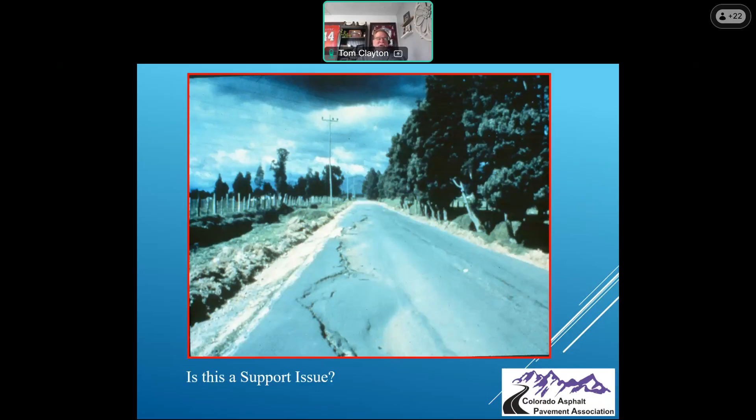Well, the short answer to that is it's something else. That was a subgrade failure, but it was caused by some other influences, such as moisture rolling across, running into that ditch, and causing those.

So we want to make sure that we're putting the right mix down on the right roads, and then we're compacting it.

So those are just a few little tidbit slides that I put up front, so we had a little bit to chat about as we get going.

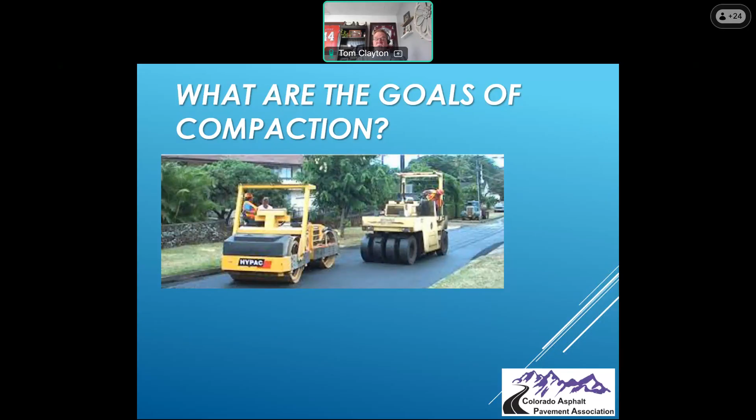The real question here is, what are the goals for compaction? The goals for compaction are to maintain the grade, slope, and profile that the paver left. The paver is a very sophisticated piece of equipment in today's world. We want to make sure that what we're doing on the back end doesn't affect what we did on the front end.

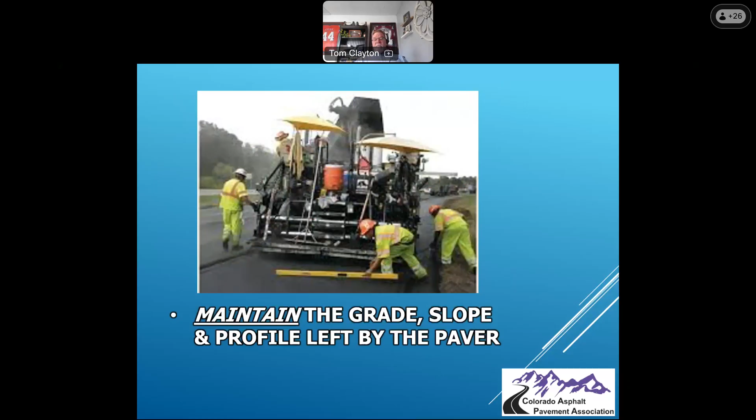We talked a little bit last week about placement and all the things that go on with placement. So in this presentation, we're going to talk about how to maintain that. There are a few things that we want to talk about, and that's passes and coverage.

There's a lot of discussion about what is considered a pass. Passes, in my mind, are every time that the roller completes a loop—that's a pass. So if it goes down and back, that's one pass. Down and back is two.

You can see in the illustration here that they're saying a pass is when it passes you once, then passes you again, and passes you again—those are passes. Those can be debated and talked about for long periods of time. But for my illustrations, let's say that a cycle is considered a pass.

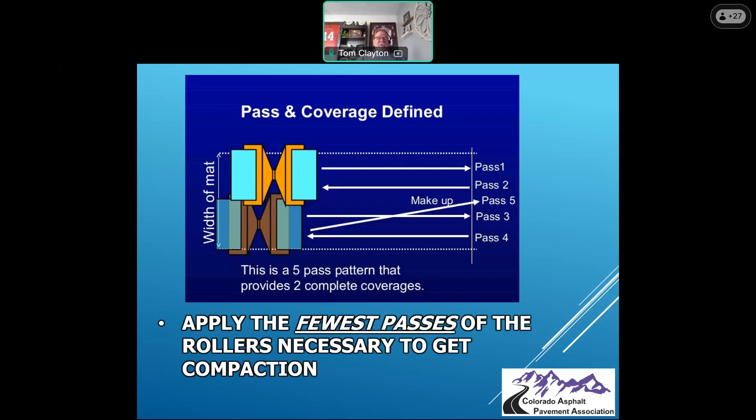The goal is to get the material compacted with the least amount of passes to get the density required. We want to apply the lowest amount of compactive effort to get the highest amount of density.

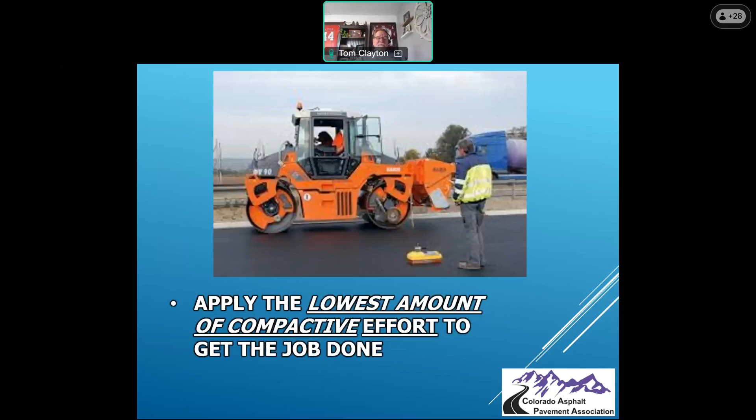We have to understand how the material compacts. It compacts on a curve. It will get to a certain point where it reaches its maximum density. And if compaction energy is still being applied, it will start losing density because it'll start breaking apart the particles,

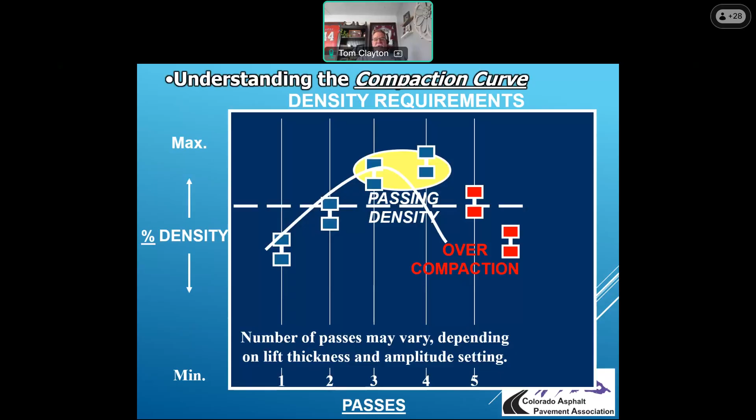and you'll lose density in the mass. So we want to make sure that we're not over rolling it, we're not under rolling. We want to be right in that sweet spot to where the material will get us right into that yellow zone on my illustration there. We want to stay in that illustrated area.

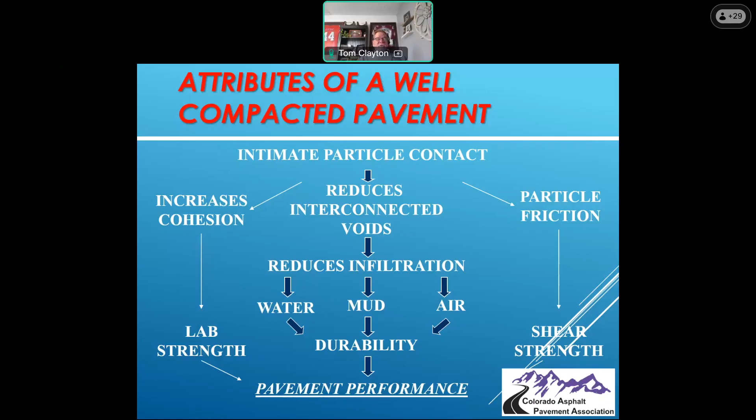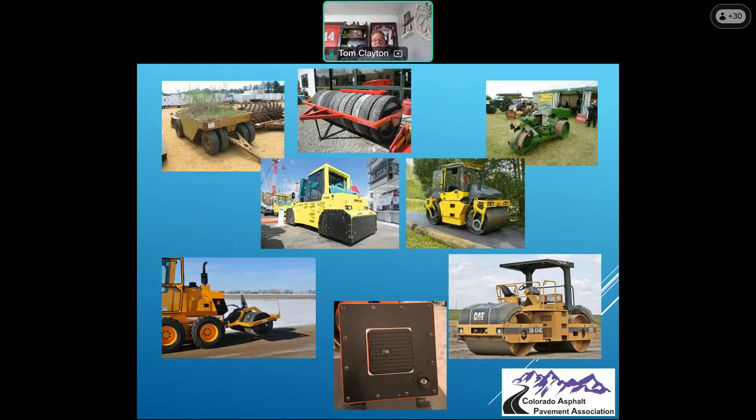The two you see are the Cat roller and that Bomag roller, the bright yellow one and the dull yellow one. Those ones have what's called IC, or intelligent compaction, on them, where it's monitoring the resistance in the mat. But this new HOM one is the first one that's come out that's actually measuring density, and it has to be correlated with a nuclear gauge or cores. They run over it three times, and then it will correlate, and it reads actual density. So that's a very new concept, a very new piece of equipment.

So other things that we're seeing more and more now that we didn't see even 20 years ago was night paving operations. Night paving used to be kind of a one-off, two-off kind of thing. Now night paving is becoming more and more mainstream. With that, we're seeing more SMA go down, we're seeing SMA at night, which creates a little bit of a problem.

SMA, in order to get it compacted properly, you have to have plenty of heat. At night, we lose heat. It's hard to see asphalt going down at night because it's black, and it's dark at night. It's hard to see flaws. It's hard to see missteps.

It's hard to see things that are going on, so those are things that we got to look at. Other things you can't see during night paving are segregation, and you can't necessarily pick up the bumps and dips, the smoothness issues. But smoothness is a high priority on all roads, whether it be a state highway, an interstate highway, a city road, a collector, an arterial, or a residential street. Keeping roads with low segregation and good smoothness is critical for the long-term life of the road, and that's all part of what we need to do in our compaction process, to not create problems through the compaction process. So how do we do that?

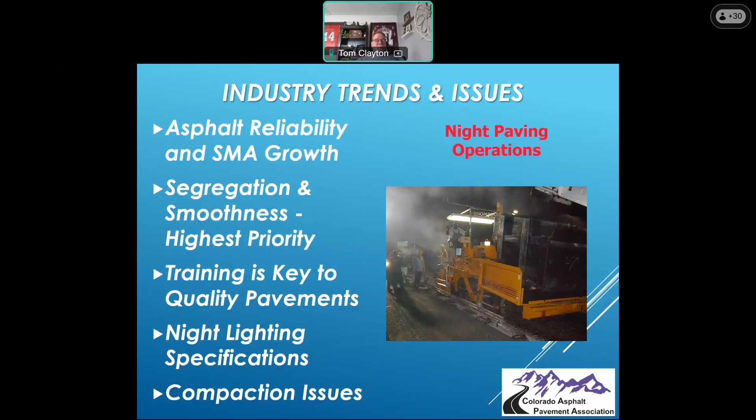Staying on the night paving topic: night paving used to be done by candle and flashlight. In today's night paving world, the light plants and lighting specifications are crazy, how much light they have out on these plants to make everything very visible. And then that last point is the compaction issues. The compaction issues at night happen because the mat cools down quicker, especially when using a polymer modified mix. There are things we have to adjust to at night that we wouldn't do during the day.

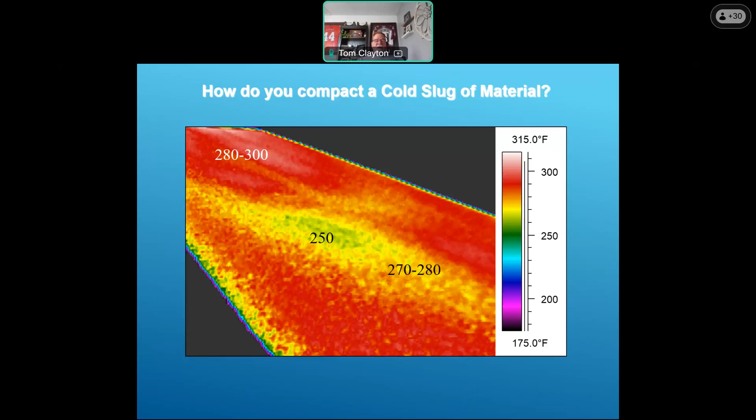How does a contractor know what to do to attack that cold slug in the mat? Well, the short answer is they probably don't even realize it's there. They're going to run right through it. That's probably either at the beginning of a truckload or at the end of a truckload, and they don't even realize it's there, not unless they have some sophisticated equipment, which I'll talk about in a minute.

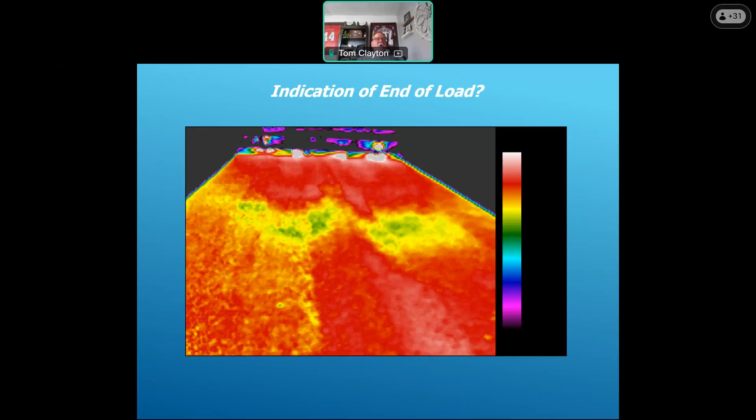If we get a cold end of one load and a cold beginning of the next, we're going to magnify this, or double up the size of that issue. How does the contractor or personnel on site, the city inspectors, county inspectors, state inspectors, the testers, how do they know that's there? Well, you have to have equipment in order to figure this out.

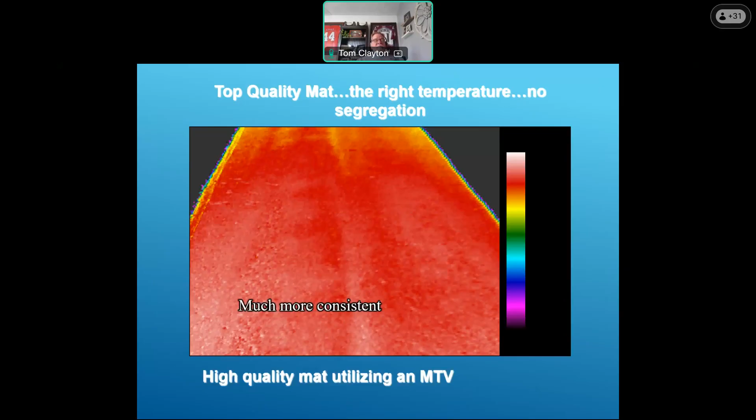So a good quality mat, you can see that consistent temperature all the way across the mat. It's going to help in the compaction process, and help make sure that when they set up their roller patterns, they'll be able to roll it in a good, even pattern all the way across, up and down the mat. So the whole goal here is to roll for quality.

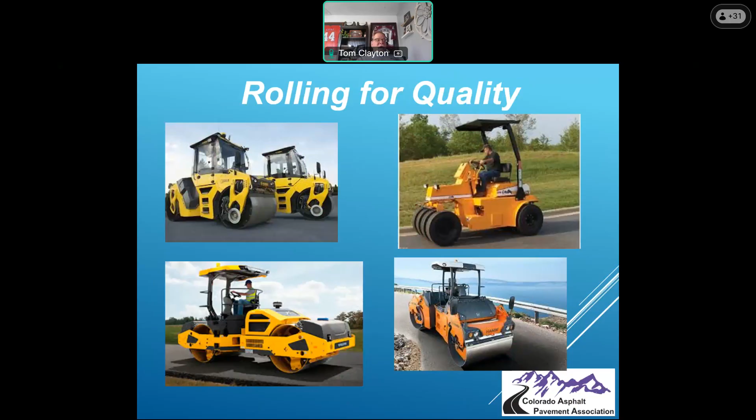We want to make sure that we have the proper equipment. You can see I've got pictures of all kinds of different equipment here. In the upper right, the little Lee Boy 7-wheel roller, you don't see many of those except in small parking lots or small pavements like bike paths, those kinds of things. Then you have the big boy rollers, shown in the other three pictures, that we'll use out on city streets, highways, byways, airports, those kinds of things.

Construction of quality pavements, if those of you who were on last week should have seen this same slide. It is a balancing act between the production, the trucking, the paving, and the compaction. The problem with all of this is the first three can change: the asphalt production, the trucking, and the paving. Those can change at a drop of a hat.

We can increase our production. We can increase the number of trucks. We can increase how many tons are going down. But if we don't adjust the compaction process, we could lose everything, and we could lose it very quickly if that is not adjusted. So it's important to make sure that everything stays in balance. If any of the first three change, the last one's got to change with it.

So the goals for compaction, what are we trying to accomplish, is we want to be able to put the material down so that it will outlast the design life. Design life on pavements today, depending on what you're doing, a new pavement, you would expect it to last anywhere up to 30 years of total life. That's for the entire pavement section. The sub base, the base course, and the pavement section should last 30 years or greater without having to rebuild. Now, with that said, there are other things that we have to take into consideration.

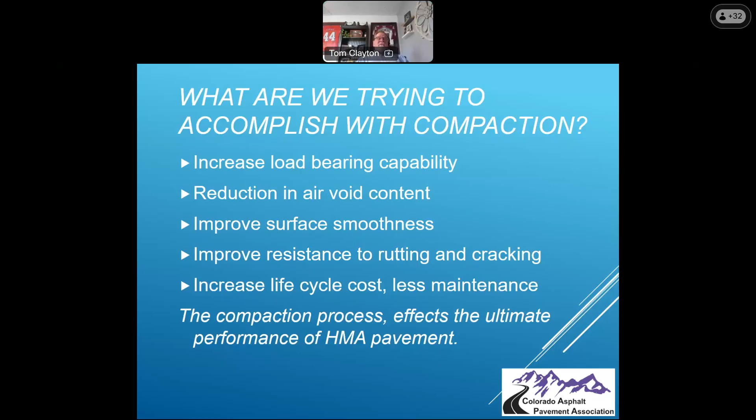So the fifth bullet point there is increasing the life cycle costs, which is less maintenance. We close up the voids. We get higher density. We're not going to see the wear on it. We're not going to see the water and oxidation damage. So we're going to increase the life cycle by not having to do as much maintenance on it for potholes, crack sealing, those kind of things, because we're going to take care of that on the front end. So the compaction process can affect all of those things. Those are things that we have to be looking at.

Variables for compaction.

Question popped in: how many municipalities are replacing all pavements on a 30-year life cycle? That would be absolutely none.

With funding constraints, It feels like we need 40+ year pavement cycles. Early failures are extreme. Eric, it's hard to predict.

I talk from where I'm sitting in my office right now. I'm looking out on the road right in front of my house that was repaved this year. The road was built in 1973, and this was the first overlay on it. They did one intermediate treatment in 2008, a slurry seal, but this is the first overlay that's been done.

So it was 47 years that this road had lasted. So I think what you're saying is our engineers need to figure out how to design to 40 minimum. They just haven't got there yet because they're engineers, and you being an engineer, they're always looking at that factor of safety. If I say it's a 40-year design and it only lasts 35, they're going to come down on me.

So I agree, it's impossible to predict an early failure, and it's costly because once it happens, you have no budget for it. Well, where you guys are at, you have an unlimited budget - I say very facetiously, just like any city or county or state. There's not enough money to maintain the roads as you have them right now. So it's virtually impossible. So yeah, I agree.

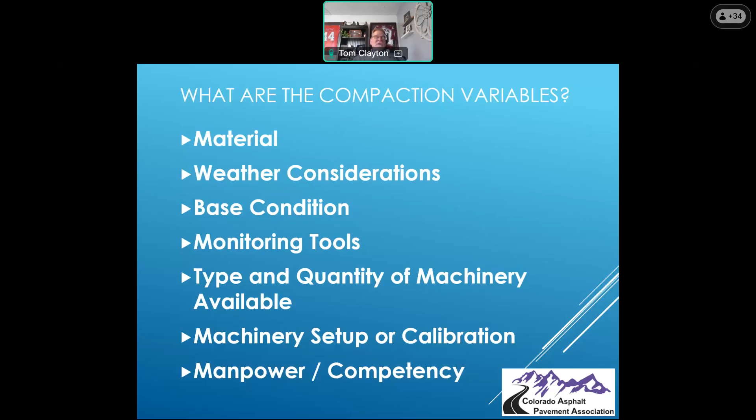So we want to make sure that we have all of that stuff done. The last one is, it doesn't matter how good your equipment is or how good the 6 steps above are. If your manpower is not sufficient, if you're having people jump off of one piece of equipment to get on another, or you have people on pieces of equipment that don't understand the equipment and competency is low, you're in a losing situation. We want to make sure that we don't get into that losing situation.

I talked about Super Pave. I talked about Marshall. I talked about where we're going with balanced mix design. Balanced mix design is just another evolution of Super Pave, going to do it with a little bit different twist.

So Super Pave is an acronym for Superior Performing Asphalt Pavements. It's a superior approach for going after what we were doing pre-Marshall. I'll talk a little bit more about that. Super Pave really took us out of - going back to the question that was asked a little earlier about 20 and 30-year designs.

When the interstate highway system was started in 1956, it was designed to last 30 years. Super Pave started in the early to mid 1980s, because our interstate highway system had reached its 30-year design life, and they were looking at it going, what do we need to do? That's why they said we got to do things differently, and came up with Super Pave.

Prior to Super Pave, Marshall was, we can use whatever materials you got, wherever you got them, we'll make a road and make it last. One type of binder, and it all works. Well, yeah, it was great, and it's still around - we're still using Marshall 100 years later - but it wasn't the cat's meow.

Super Pave was never designed or intended to end. It was intended to be a continually evolving process, but it kind of got stagnant. We said, oh, everything's doing great, let's just leave it alone. Here we are now, nearly 30 to 40 years later, and we were still stuck in the same spot. That's why everybody's starting to look at balanced mix design now, which is the next step or evolution of Super Pave.

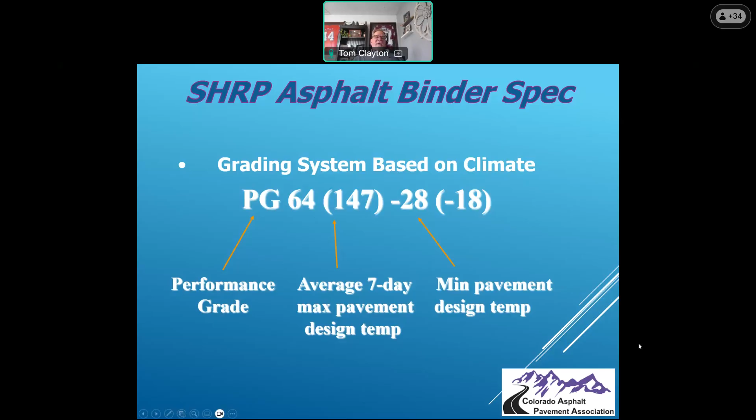There are weather stations all across the country. You can go on the NOAA website or ltppbind.com and pop in a zip code, and it will show you every weather station within that zip code. It will tell you what is a 50% reliable binder and what is a 90% reliable binder. But that doesn't mean those are the right binders either. Just because it's 50% or 90% reliable doesn't mean it's necessarily the right binder.

We see people over-specifying binders all the time. It'll say, well, this is the 90% reliable, so we're going to use that one, say PG 64 minus 22. Well, it's a lightly traveled residential situation. You might want a softer binder, like a PG 58, in a residential, lightly traveled situation.

So moving on to compacting. The difficulties we see are more crushed aggregates, less fines that don't create that lubrication. The fines hold the oil, which creates the lubrication to let the particles move during the compaction process. So the more crushed particles there are and less fines, it's going to become a problem.

Cheating the binder out of the mix, with lower asphalt cement content or lower binder content. The binder, again, is a lubricant. And if we cheat the binder out of the mix, we're not going to be able to lubricate the particles and let them move by each other.

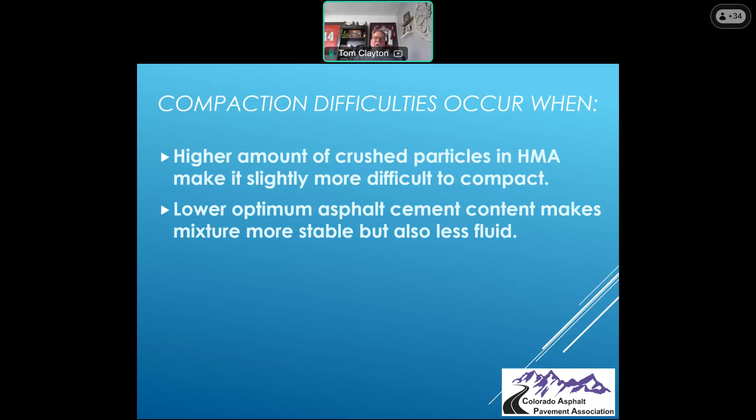That is why moving to balanced mix design is becoming more and more of a top shelf issue, because we want to make sure we have that binder in there to keep the particles moving to resist the cracking, but not let it rut. So we're going to work through that, and we're going to get there.

Temperature is ignored, and there are two or three temperatures we can talk about. The ambient temperature, which is really irrelevant, the mixed temperature, which is really a driver, and the ground temperature, which is a driver. The two drivers, ground and mixed temperature, are critical to look at when paving. Ambient temperature is irrelevant.

If it's a cold weather day, ambient-wise, and the ground temperature is sufficient, and the contractor has temperature in the mix, there's no reason they shouldn't be able to place the material properly and get it compacted. It's going to require a change in thought, a change in process.

If it's a cold day and I'm the owner or the contractor, I'm going to have my testing people on site the minute material starts coming out of the back of the trucks into the paver. And I'm going to make sure that when the rollers are on it, I'm getting density in that first truck, the second truck. I'm going to make sure we do what we need to do.

Do we have to tighten up the rollers? Do we keep the rollers closer to the paver? Are we staying within the compaction temperature zones? Those things are going to be looked at. So if we drop out of those compaction temperature zones, that's when temperature is being ignored, and we can't do that.

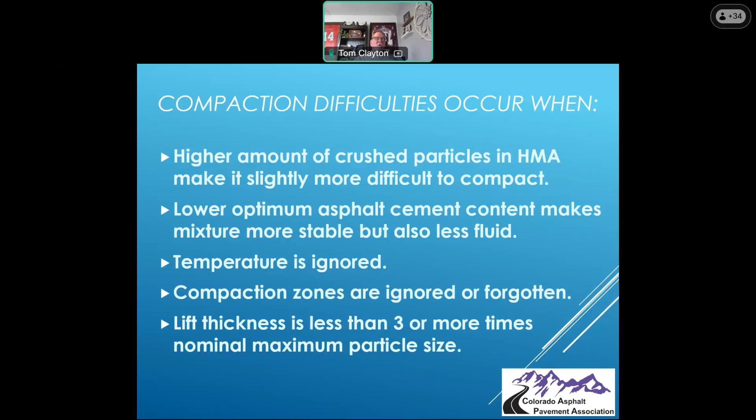It's like on a car, all of a sudden you see rust all over your car and you go, where did that come from? I never saw it. Because it rusts from the inside out. This is the same thing, the particles are crushed internally. They don't hold up through traffic and weathering. They fall apart. You start seeing delamination.

The last bullet point here is, if the contractor's equipment setup is ignored, they've got to make sure they set their equipment up properly, that they've got the water spray system on the steel drum rollers, and that they've got a good drip system on the tires, on the rubber tire rollers.

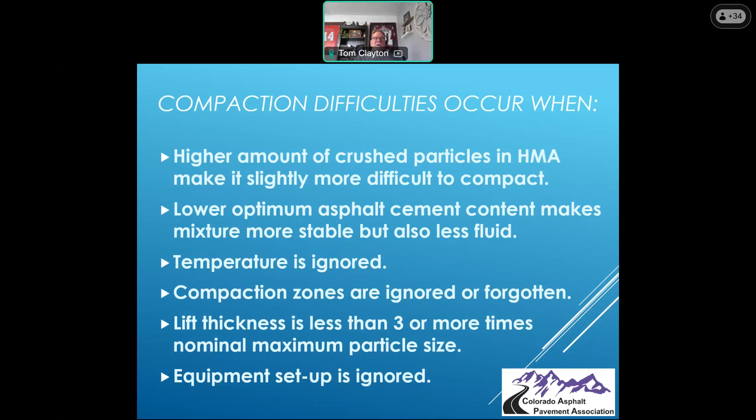They got scrapers and mats on both of those, that the paver is set up properly. Everything has to be set up properly.

We know there are still a lot of holes in the science, but it's important that every person on the team be out there to help plug the holes. And it's not, well, you need to do this, you need to do that. No, it's need to have a discussion. Why is that happening? What went wrong here? What can we do differently here? What are those things? We have to understand the appropriate things to do.

So these 6 bullet points here. What is the appropriate compaction temperature? I say this all the time. I lead the inspector certification, asphalt APM, asphalt paving materials inspector certification sessions, and I talk about this all the time. The appropriate compaction temperatures for any project should be determined right at the beginning of the project, whether it's a residential overlay or an interstate highway. On interstate highways, state and federal jobs, you have to do what's known as a CTS, or a compaction test section. Residential paving, you rarely see anybody do an official compaction test section. However, the first day they are paving on the project is the compaction test section.

That will set up the appropriate compaction temperatures. When does the breakdown roller get on? When it's this temperature, and he's done by this temperature. The intermediate roller gets on when it's this temperature, and he's usually done by this temperature. And the finish roller, same thing. How many passes? Are they in vibratory or static mode? What are all those things?

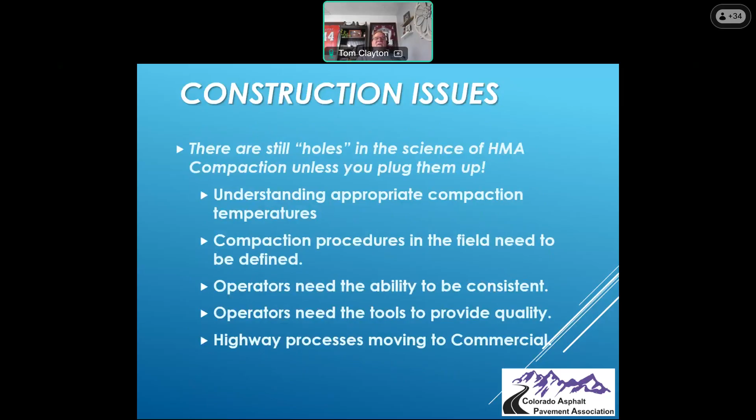The operators need to have the ability to provide quality. They need the tools. Do they have the right monitoring tools? Do they have an infrared heat sensor, or just a laser temperature gun? What tools do they have to make sure that things are being done? And then understand the difference between a highway process, a city street process, a collector process, and a commercial parking lot. They're all different. This is just a bunch of temperatures that I threw in here.

This is years and years of gathering data. So the material leaves the plant between 350 and 270 degrees, depending on the type of material. Some of you are saying, man, I hope mine's not coming out at 350. Well, if they're doing SMA, it might be. If you're doing a dense graded mix, 290 is probably about where you want it to be. You don't want it to be anything over 290.

That's where we're at. The next range, 340 to 315, is where placement occurs. That's on SMAs. Again, if you're coming out of the plant at 290, it's going to be pretty tough to put it down at 315. So it's going to be lower.

Compaction range from 340 to 110. And I'm seeing some of you, figuratively, your heads are shaking and your eyes are wide open. I say 110, yeah, 110. You can compact down to 110 degrees. However, with that said, everything has to be done correctly, meaning they have to have put in a warm mix additive, or WMA. If they don't have a WMA, they should probably be off the mat by no less than 160 degrees.

You can keep compacting, but it's important that somebody be out there monitoring that. If it starts to crack, you get fine little cracks across the mat. It's too cold, it's breaking apart during the compaction process, meaning the binder has lost its cohesion and broke apart, creating all those little fine cracks that allow for oxidation and moisture damage to occur. So it's important that the inspector on the project be out there watching for that if they're paving or compacting at lower temperatures.

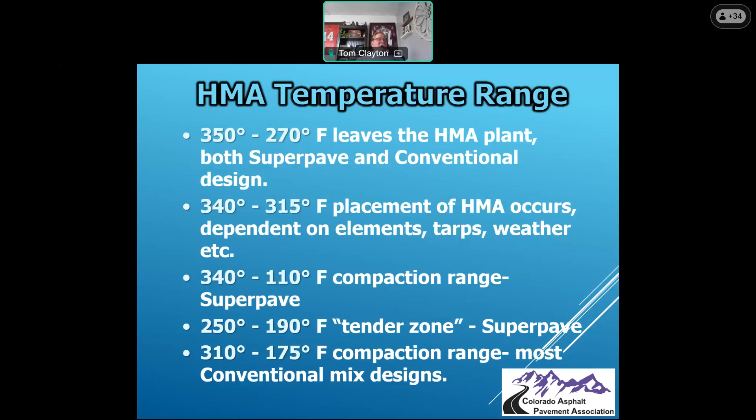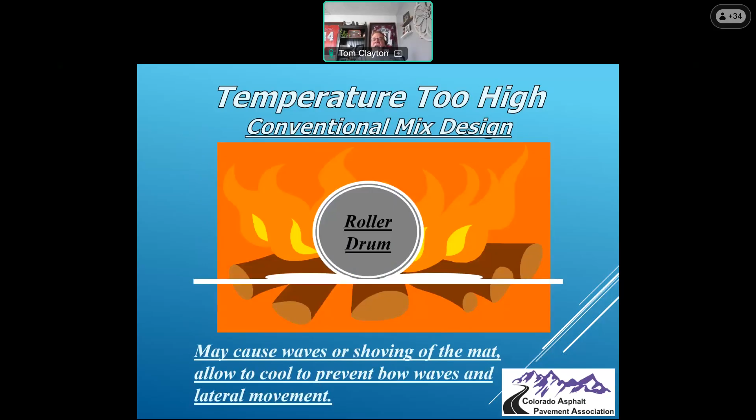Can go down to 160. Again, with WMAs you can get even colder. If the mix is too hot, it's going to roll, bubble, push - there's lots of words we can use here - cause waves. We want to make sure we're not getting on it too hot, not letting it get too cold. So it's important that the mix coming out of the plant is the proper temperature and that it's being put down at the right temperatures.

Compaction at 240 and above is recommended for breakdown and intermediate. Finish rolling, obviously, they want to let it get down to a point where the binder is going from its liquid to its solid state, and you're just above that point. You want to finish it just before it goes from liquid to solid.

So if the temperatures are too low on a conventional mix design - well, I really blew that misspelling, conventional mix design - we want to make sure the mix will work on those things. So conventional mix design, if you get below that 175, it's going to be tough to get the material to compact.

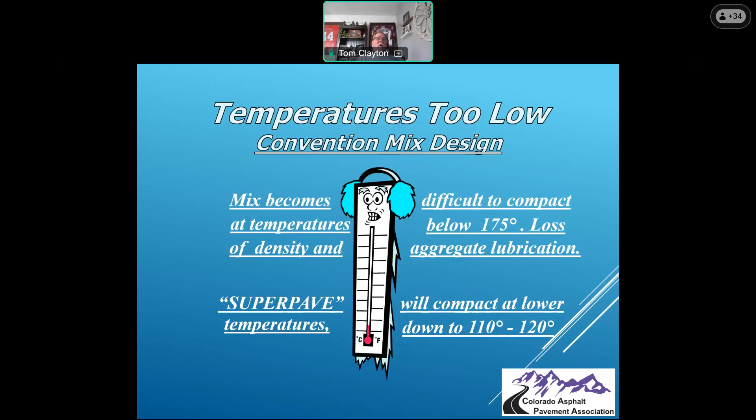That 110, 120 with the WMAs in the mixes. But it's important that once they drop down below that 170, 160 range, the inspector or other personnel are out there watching to make sure they're not causing damage to the mat during the additional compaction process.

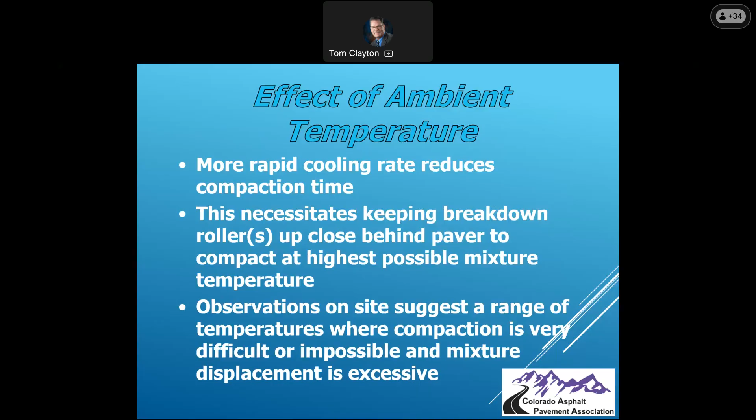The effects of ambient temperature - again, I talked about it being irrelevant a little bit earlier, but it has to be monitored. Process to get it to compact in a sufficient manner and get it to give us our life. So the necessity is that we got to make sure we are monitoring the situation, the contractor's monitoring the situation, all the team is out there looking at it, making sure we get everything done in a smooth and efficient manner.

Oh, I've got a couple things coming in here. Hang on, looks like it disconnected and reconnected. Now the slides aren't showing. We can no longer see the slides. Trying again. Are we back on? You guys let me know. I've got one that says effective ambient temperature up. Somebody let me know, no slides yet. Why did it disconnect? Going along fine. You can still hear me though, right? You can see my camera? But no slides, what the hell? Effects of ambient temperature. Let me know where we're at. Does anybody see it? No slides yet. Let's try this again. Hang on, stand by, let me connect back up again.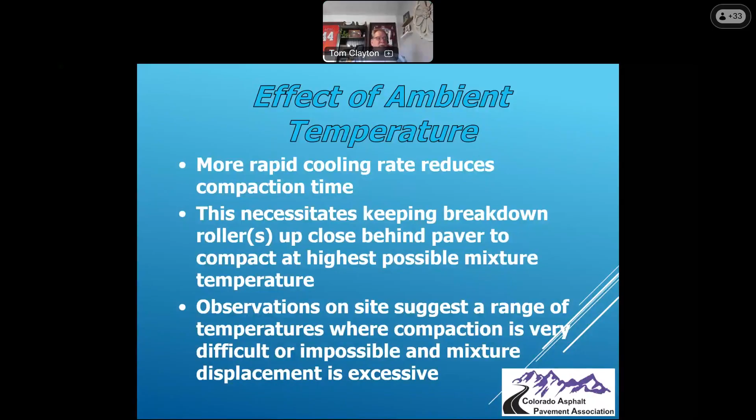All right, so I talked about the different pressures. Let me go back. So static pressure, vibration, impact, and manipulation - those kind of things are what we got to be looking at.

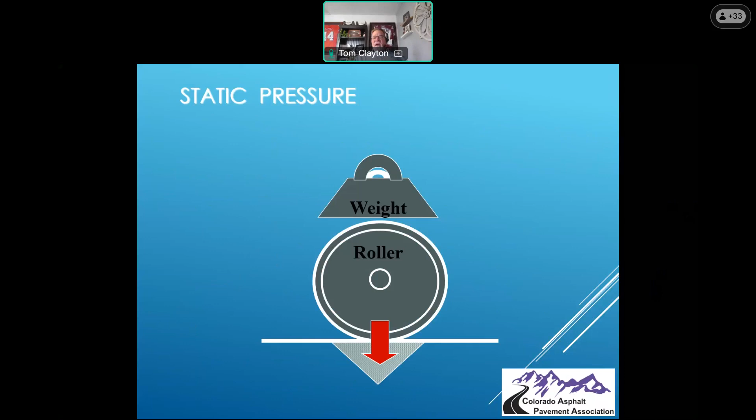The weight of the roller, the simple weight of the roller - a small roller on a 3-inch mat or 2-inch mat may be a problem. So you got to make sure we have enough energy in the compacting equipment to get the density that we need. It's important that we have the energy available. So how do we increase the energy? Well, we put vibration in it. So we could have a small roller, but if we have vibration in it, that's going to increase the energy we're going to be transferring from that machine down into the mat.

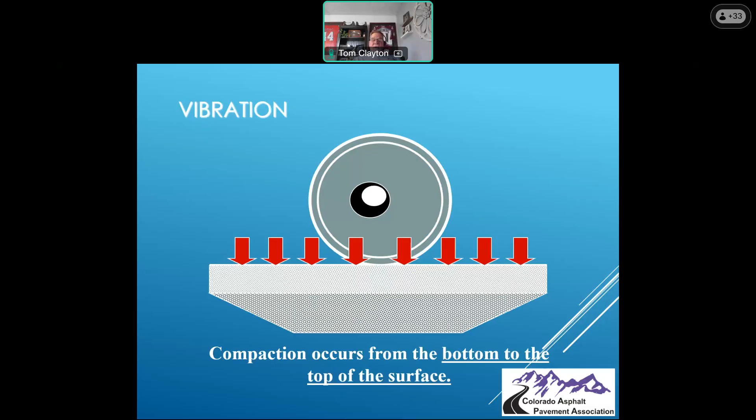So if we get that energy pushing down into the mat, then we can get the compaction. The vibration is caused by a shaft in the center of the drum that is spinning, and it's got weights in it that are throwing the drum up and down. I think it's 4/100ths of an inch. So if you're standing back watching it, you won't see it, but you can see it if it's not being done properly. That's called the impact - we're trying to impact or bounce that drum off the mat to increase that energy.

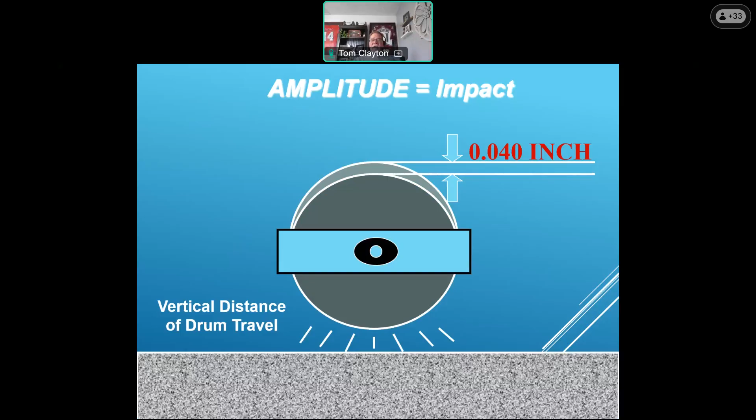The pneumatic tire rollers use a kneading action - you can see it kneading, pushing the particles from side to side. And since we have 2 sets of those wheels, it's pushing the material side to side and front to back, so we've got it going both directions.

The amount of energy being pushed through that pneumatic tire roller depends on how much the machine itself weighs, how it's ballasted, and then the tire inflation pressure. If the tires are inflated low, say 50 pounds of air in each tire, it's going to give you a much wider footprint, which spreads the ballast weight or the weight of the machine over a larger area. Whereas if you have a high tire pressure - say 105, 110, 120 - you're going to make a very narrow tire, pushing the weight into a much smaller space. So you're going to get a lot more energy on a narrow tire than a wider tire.

Now what's the deal - what should the tire pressure be? The tire pressure should be what it needs to be. There is no set tire pressure. If you have a very hard to compact material, it should be a high tire pressure. If you have a very soft or tender material, it should be a low tire pressure - but it should be adjusted for the material being compacted.

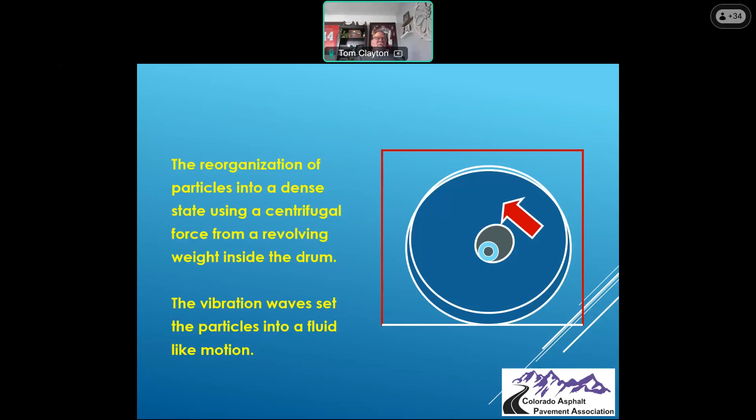So the question you have to ask yourself is, how do you know when the amplitude is set too high or too low? On the high side, you look for material that's not staying under the drum - if it's being pushed out from under the drum, they're probably running too high an amplitude. You want to watch for white caps - that means they're putting too much energy into the mat. There's too much resistance at the base and it's fracturing rock, and fracturing rock means it doesn't have the glue on it anymore.

So we want to make sure the material stays in its production state. The impact spacing should be 10 to 14 impacts per foot. I'm going to show you the next picture and you'll see it's hard - they did not keep it at that 10 to 14 impacts per foot. And what that does is affect the long-term life of the road by creating chatter in the road, which creates vibration in the road as vehicles go over it, which breaks the particles apart.

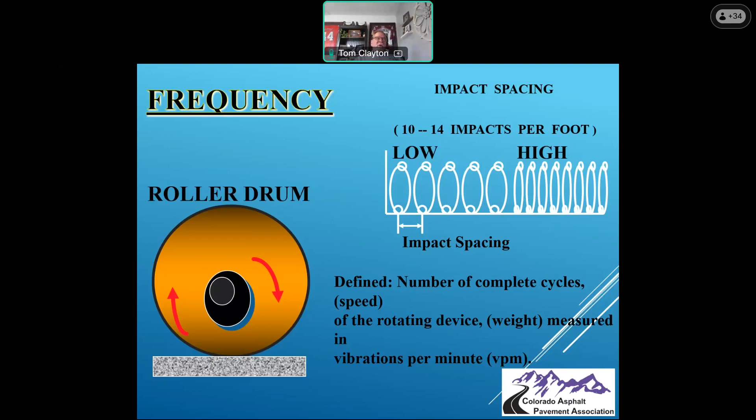So it's important that you have the right number of feet per minute. If they're traveling too fast, the impacts are going to be too far apart. You want to make sure it's traveling at the right speed so that they're filling all the gaps.

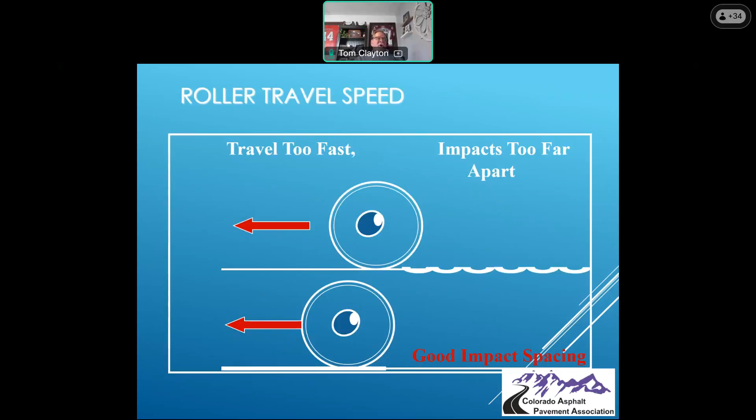This is a thing I hear from roller operators all the time. What I just talked about, their finish roller was 1,000 feet back, now he's got to catch the paver. Well, no, that's not true. You've got to stay within your zone. Whether you're the breakdown, the intermediate, or the finish roller, you've got to stay within your zone.

So some compaction questions I get asked all the time. Does moisture change the mix characteristics? The answer is absolutely. Moisture is also a lubricant, but moisture in an asphalt mixture, because the asphalt is 250 to 300 degrees, will turn the water to steam. Steam is a stripping agent. Steam will strip the oil off of the rock and bring it to the surface, and then the bubble will break and you'll see blotches of oil all over the surface, which means the coating on the rock has changed, which means the glue that holds the two rocks together has been changed, and now we've lost our cohesion through that moisture and the characteristics it has caused.

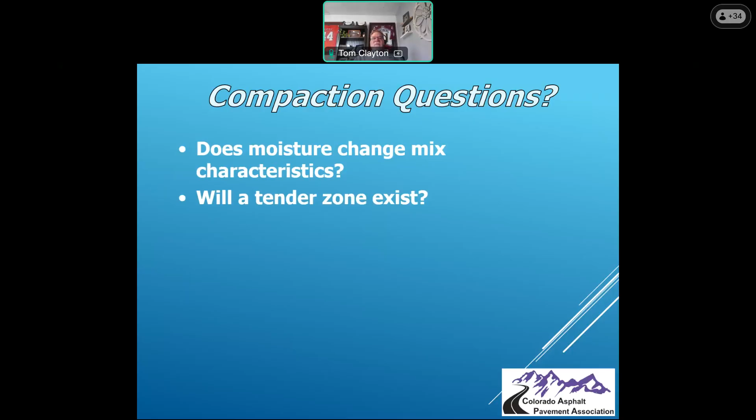Will a tender zone exist? That is a really tough question to answer. I have not personally seen a mix with a tender zone in it for years. Designers have gotten really good at designing around tender zones. So it could exist, you might see a tender zone in a mix, but it's been a long time since I've seen one in an asphalt mixture.

Do PTRs, pneumatic tire rollers, pick up material? The short answer is not if it's done properly. They keep the tires hot and they have a good approved non-petroleum based release agent. If they keep the tires hot, the release agent is on there, and they've got good scrapers and mats, then chances are the pneumatic tire roller will not pick up the material. If it does, you get the elephant globs or the cow pies on the mat. It's just a matter of the contractor adjusting what they're doing, getting back to what they should be doing, and getting back on it.

This question is the unknown question: how much compactive effort is required? The short answer is just enough. The long answer is it's going to take time and effort to figure out what just enough is. I talked about that a little bit ago, creating a compaction test area or test section, whatever you want to call it. If you have that in place, you know that works. And if all of a sudden they're starting to struggle, or you see it was supposed to be 4 passes of the breakdown, 6 passes of the intermediate, 2 passes of the finish roller, and all of a sudden they cut it in half, now you might understand, wait a minute, we've got a problem. Get the density gauges out there and figure out if they cut what we need to do.

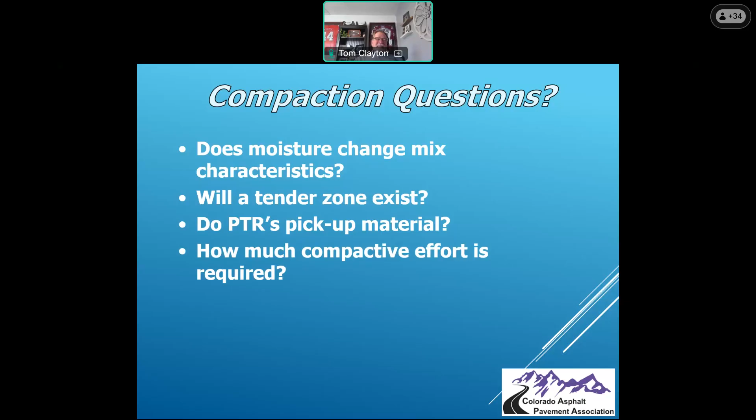Can overrolling cause crushed aggregates or bleeding? I've already said that, go back up to earlier where you get white capping. Overrolling means it gets too dense, it will start crushing the aggregates, and it will start creating more internal problems. Bleeding is probably not a problem; we're not seeing enough oil in our mixes.

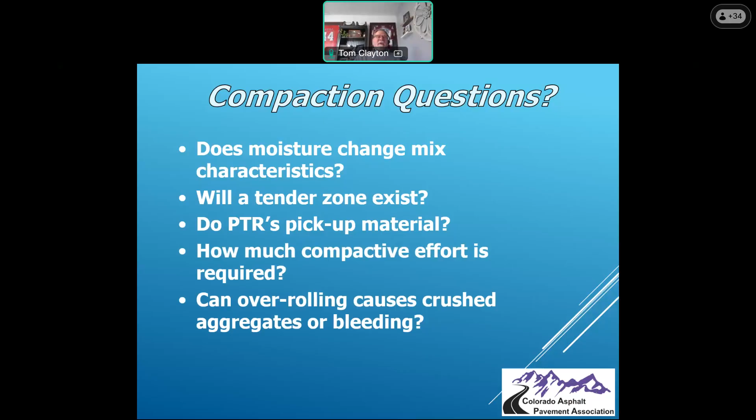Excuse me, even overrolling can cause bleeding. So it's important that the rolling techniques be followed in a regular and consistent manner. It's important that rolling techniques be observed, not just dismissed.

Roller operators are as important, if not more important, than the paver operator. If the paver operator screws up, the roller operators can sometimes fix it. But if the roller operators screw up, the paver can't fix it. So the roller operators are the guys on the back end that can make things right, even though they might not be on the front end. You have excessive handwork and other things going on.

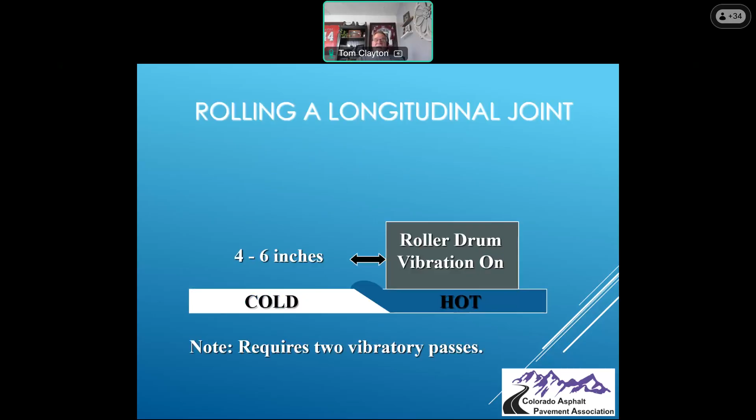So the question here is keep it smooth and roll it right. Now, rolling joints - there are two schools of thought here. I have always been in the school of thought that you roll from the hot to the cold. You pinch on the hot side, and then on the second pass you go back and roll on the cold side.

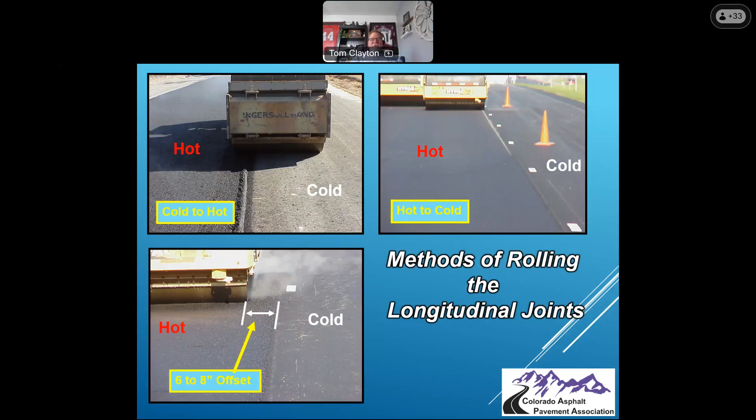You pinch on the hot side, 6 to 8 inches, as you see in the bottom picture. Pinch on the hot side, then roll back over and force all that excess material down into the joint. That's the best practice.

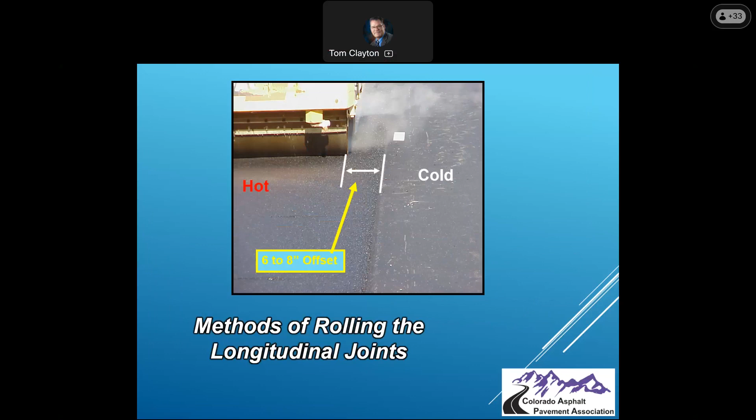Joints want to pull apart, but we can slow that down by the way we roll. Again, from the hot side, pinch, go back, roll over and force all the material down into the joint.

What the hell? Let me bring the slides back again. I can do that. All right, back - I don't know why it keeps doing that. I'm sorry, I apologize, that's WebEx. I'm going to have to talk to them. Should be back on now. All right.

So on the hot side, pinch 6 to 8 inches off the joint. Have that extra material at the joint. Come back, overlap about 6 to 8 inches, and force all that material down into that joint to create that nice tight joint.

Just another illustration making sure we do that hot to cold - you see the little bump there, from cold to hot, hot to cold. But again, hot to cold is what we're seeing today - that's what most people are using.

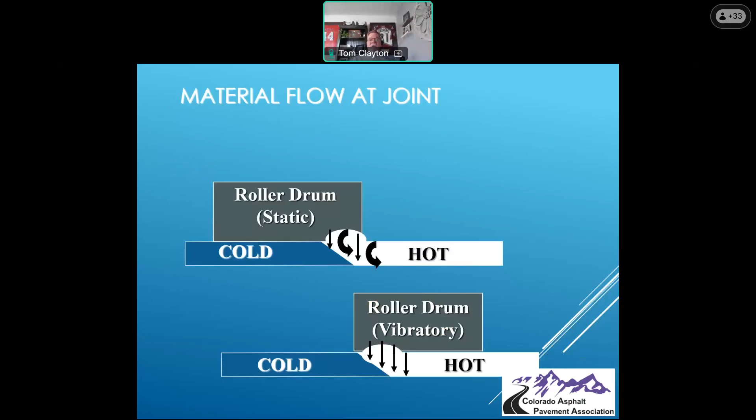When you're edge rolling, roll 6 inches off the edge on an unconfined edge to pinch it, then go back out and roll completely out to the edge. The reason is that if the roller runs all the way up the edge, at the edge of your mat you won't have your thickness - it will just push out. You roll, pinch off the edge, then come back. If you're next to a curb or a confined edge, go ahead and roll right up to that edge because it's already confined on the outer edge.

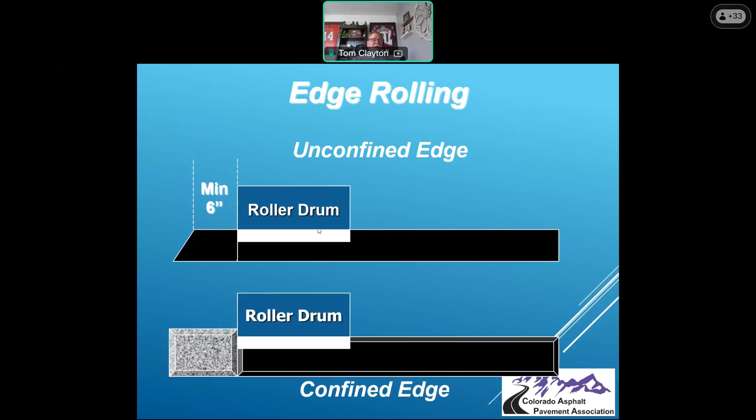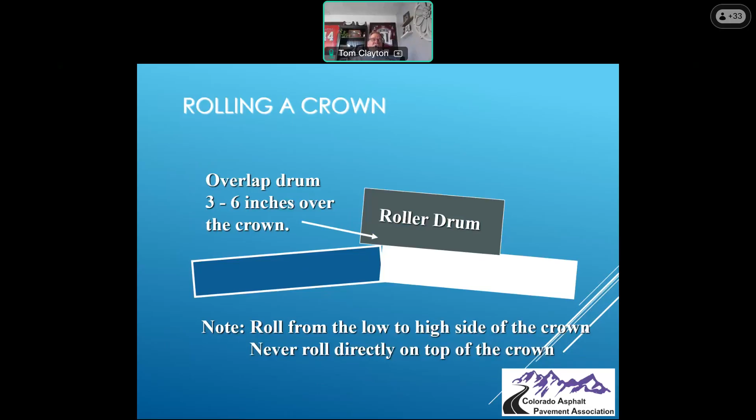On a crown, we roll off the hot side onto the crown. You never want to roll from the high side down - you want to roll from the low to the high side of the crown, so you don't push material down into the outer edge.

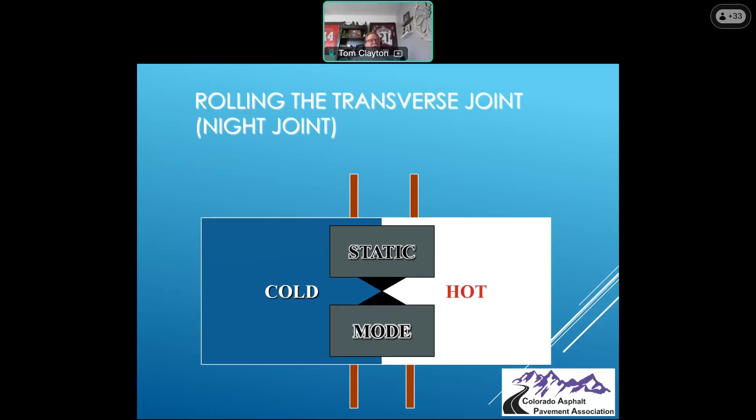Transverse joints, or night joints, ideally you want to roll them in the direction of traffic. However, 90% of the time that's not even possible, so we want to roll as best we can. You can see the red sticks or boards on the screen - those are boards the thickness of whatever the mat was supposed to be, so the drum could roll off and come completely off the mat. That doesn't always happen, but I can show pictures and talk about the way it should happen, not necessarily the way it does happen.

Rolling from the hot to the cold - you're going to start on the cold mat, go into the hot, and push back to the cold mat. Because if you push off of the cold mat, it will create a wave in front of the roller, and you'll get a little dip at your joint. So it's best to somehow get on the hot mat and push back to the cold mat. If they have to go one place, off the cold mat onto the hot, they go off, come back and push, then come back in the same spot and keep moving over until they get the entire mat compacted, pushing back to the cold to get the best density that they can.

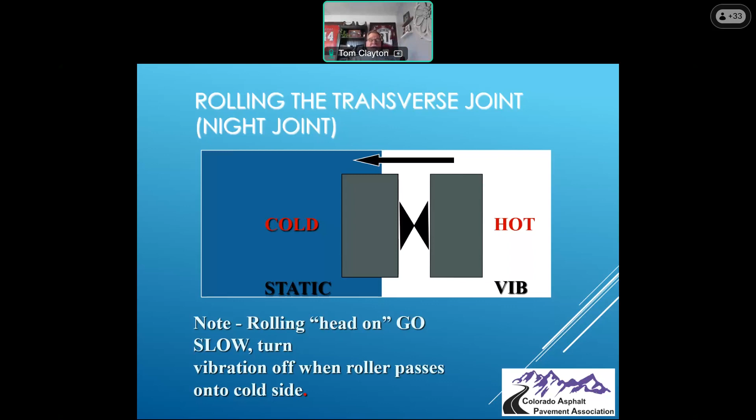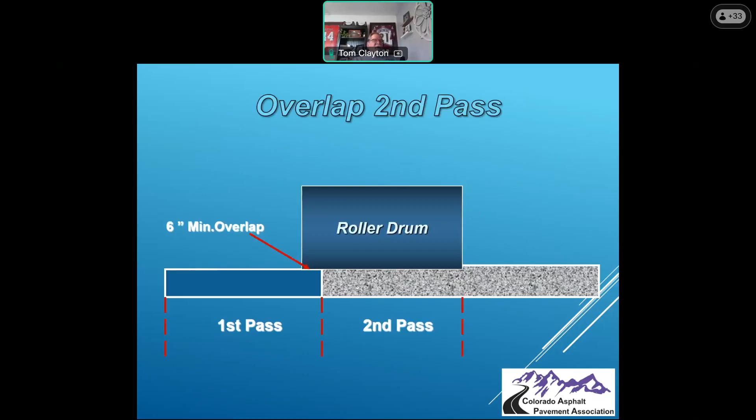It's important, as I've already talked about roller patterns, making sure that when they're setting those roller patterns, the rollers are overlapping a minimum of 6 inches, that they're rolling however many times it takes to get across the entire mat. They don't stop at the same place every time, they stop at a different spot to avoid creating one mark across the mat.

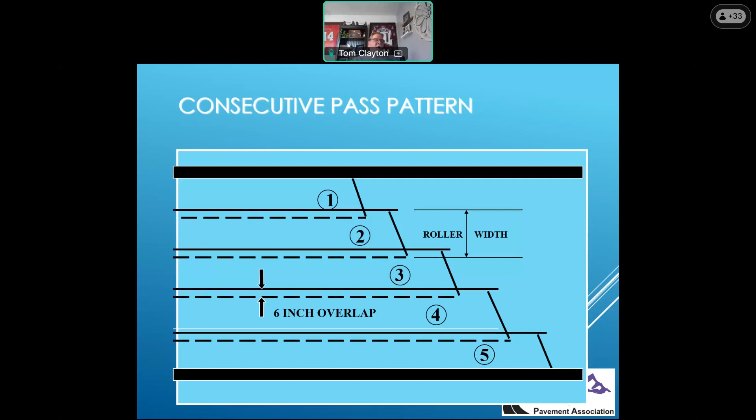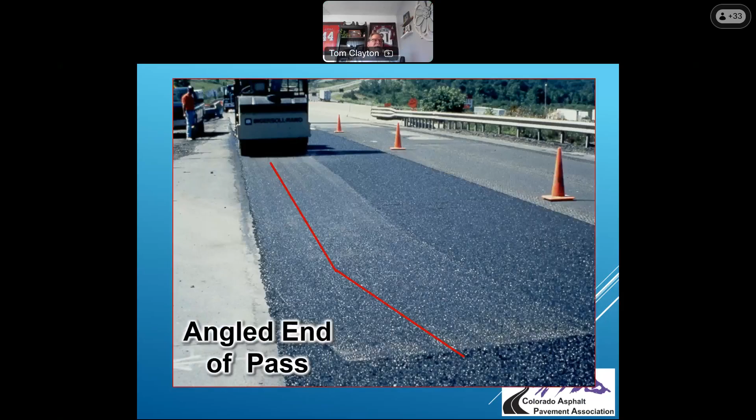They're running in different patterns, and they turn out when they get to the end, so that as they're going along they don't create a mark on the mat. If they stop straight, that mark will never come out of the mat. It will always be there, something that will be a bugaboo to anybody who has to do maintenance on that road forever.

It's important that the roller operators stick to the roller pattern, making sure that even if there's free beer, they're not running off.

For vibratory compaction, the roller operator should never start or stop abruptly. They should start up slow, slow down to stop, and turn vibration off before stopping and starting.

Again, that's with the older rollers - they had to manually do that. With the newer rollers today, they automatically shut off when they reach a certain speed. It will shut itself off.

Steering that arc that I talked about - make those gradual turns, and never vibrate while the machine is stationary.

This is a good subject to talk about. We know that a lot of times the paver will get caught up, so it has to stop - there's no trucks to feed the paver. Then the breakdown roller catches up, pulls up right behind the paver and stops. He stops on the mat straight, which I told you should never do.

He sits there, and it's in a vibratory mode. I'm going, wait a minute, he doesn't have the vibratory switches on. No, but it's a big giant diesel power plant in there that's running, and it's sitting there vibrating on the mat.

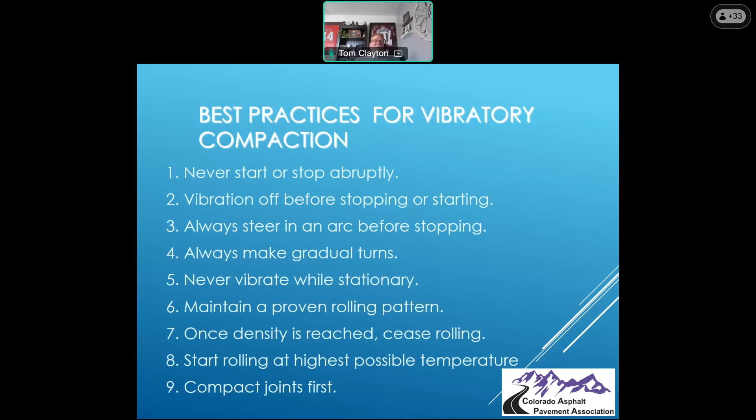The operator himself is going to feel it - he's going to feel the vibration or the shaking in the machine. You want to watch for the white capping. If you're the inspector, the person on site, watch for white capping. Listen to the sounds of the roller - when they're rolling on a loose mat or a not compacted mat, it's going to have a completely different sound. The pinging, the tinging of the drums will be completely different.

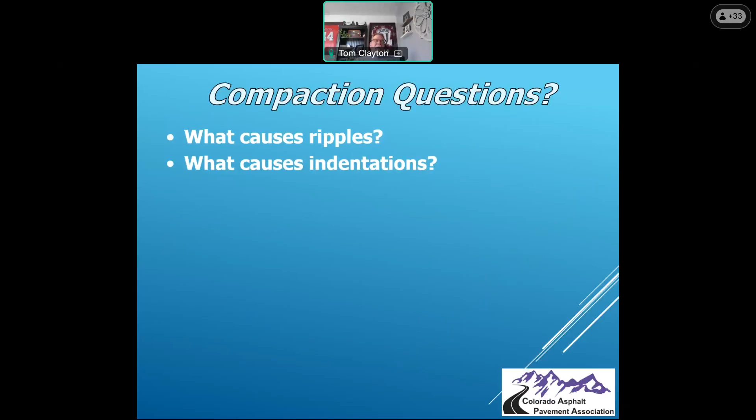So what causes ripples? Again, amplitude and frequency not being right. What causes indentations? Stopping a roller on the mat in the improper way. What causes long waves or lines? Again, not having the right amplitude and frequency.

What are two ways to balance the paver speed and the rollers? Well, it's setting up your roller pattern, and they know that they're going to pave. The paver doesn't go fast, slow - they pave at a consistent speed so that the rollers can compact at a consistent speed as well.

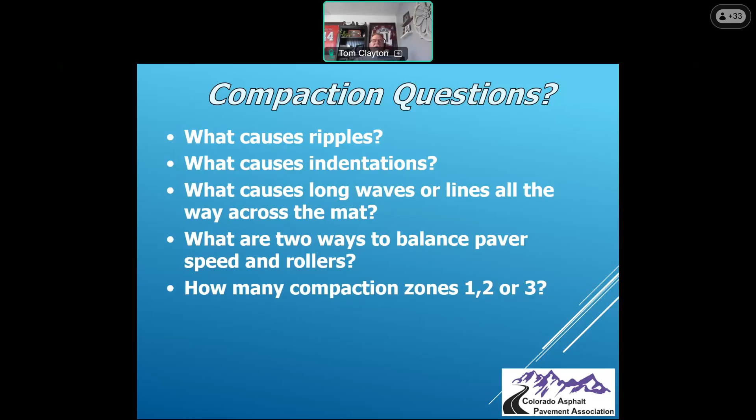How many compaction zones? I hope you've all heard me say there are 3: breakdown, intermediate, and the finish roller - 3 compaction zones. You still got 3 compaction zones with 1 roller, 3 compaction zones with 2 rollers. There are 3 compaction zones on every project.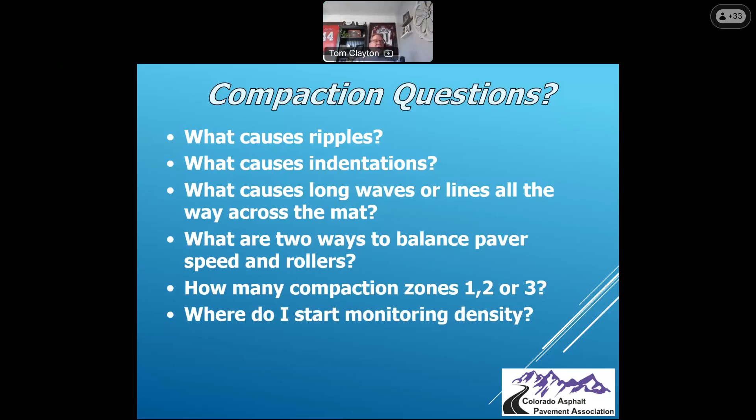Where, when does the material come out of the back of the paver? That's where you start monitoring density, from that point forward.

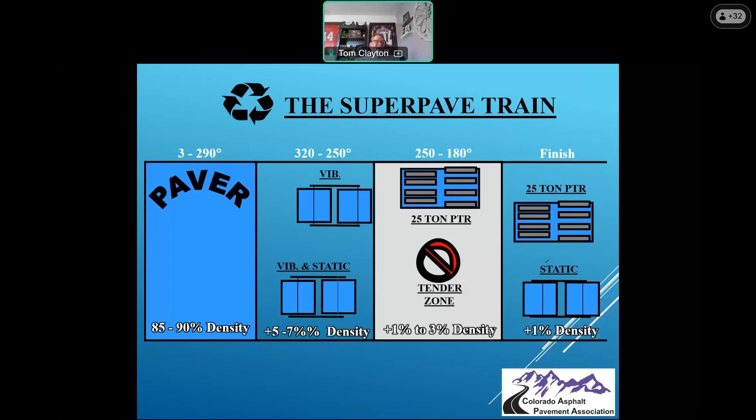Super pave train can be a little bit different. Super pave, if you've got a polymer mix or a tender mix, which again we haven't seen in a while - but polymer mixes, we don't see the 9-wheel rollers, the rubber tire rollers, because polymer and the rubber tires don't necessarily like each other. So we're going to see 3 steel drum rollers. You get 5 to 7% of the density during the breakdown and the intermediate, and then you get about 1% additional during the finish roller.

So then the finish roller turns the vibrators on. Remember I talked about just a minute ago that the finish roller is on it when it's 180 degrees or less, when the material is going from its liquid to its solid state. Turning the vibrators on with the finish roller just means you're breaking the particles apart. You are going to ruin a mat.

Not, and I'm obviously saying you, not necessarily you guys on this session today - the operator is going to ruin the mat by breaking those particles. Will he get density? Absolutely, it's going to get density. It will densify, but the dollar question is: will it hold together for the long term? My guess is it won't. You're not going to get the 30 and 40-year life out of it that you're expecting.

So the finish roller - if you're an inspector or a part of a crew and you see them have that vibratory portion on the finish roller, they need to readjust what they did. Why are they now turning it on? Go back and look at the roller pass study or the roller compaction test section, or whatever you want to call it, that you did - something changed. Now all of a sudden they're having to put that vibratory on to get the density in the back end.

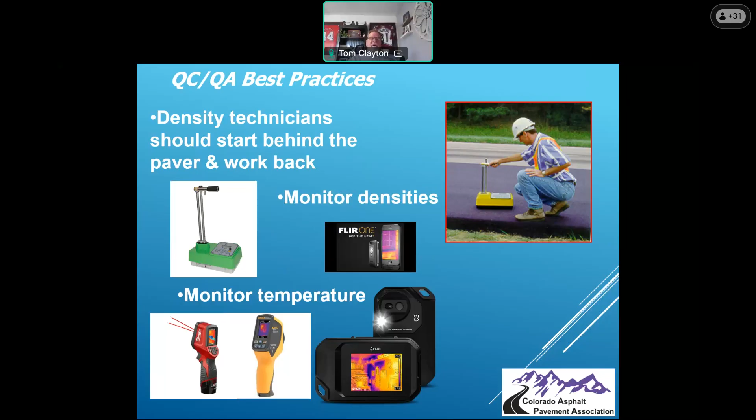There are actually apps now that you can use the camera on your phone and take infrared pictures. I haven't looked them up, so I don't know what they are, but I know that they're out there so that you can monitor infrared stuff on your pocket phone.

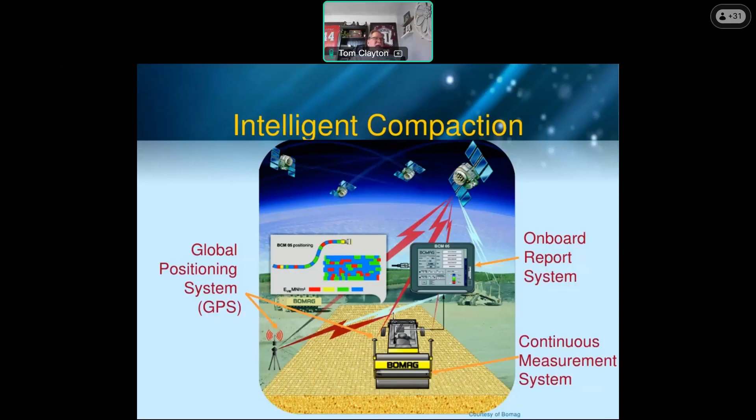Intelligent compaction, it's been around for a while now. It works off of GPS satellite stuff. There's an onboard reporting system.

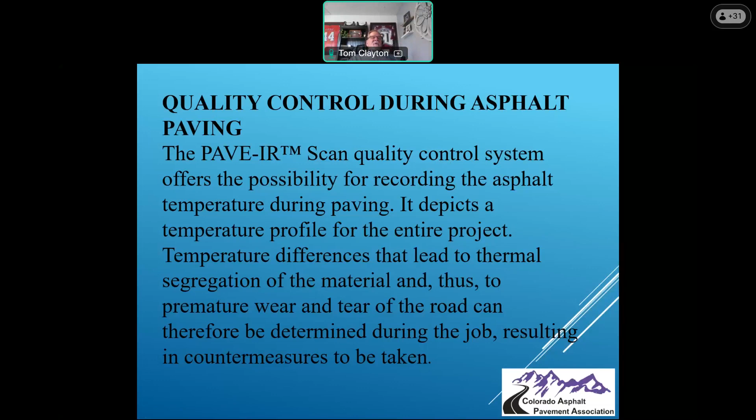Today, we're seeing the PAVE-IR system being used. It's an infrared scanner that scans the mat during the entire paving process. It's up on the paver and it's scanning the mat, it will actually look at the mat. It will relay information to whoever has the data collectors - that means there could be one on the breakdown roller, the intermediate roller, the finish roller, and it talks back and forth. The system works off of GPS, and all kinds of things.

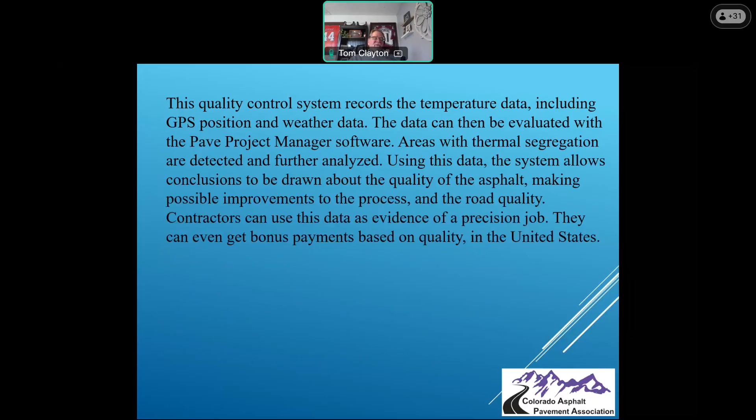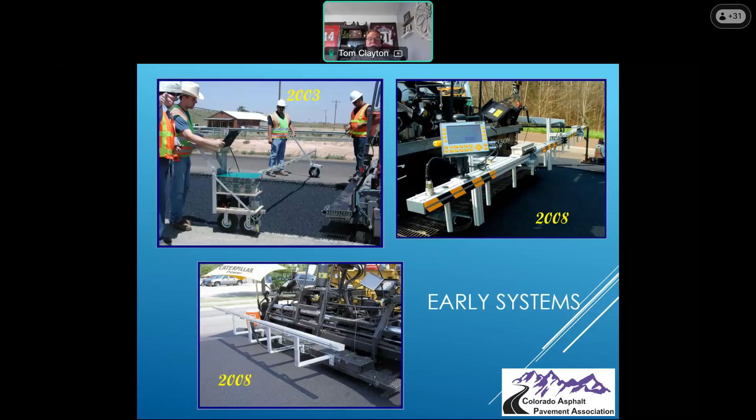This is the system when it was initially developed in 2003, shown in the upper left there. In 2008, they moved it from being pushed behind the paver to actually being attached to the paver. And then in recent years, they've actually improved it even more now.

They've got the scanner up on the top of the paver, so it's out of everybody's way. It's a lamp that's rotating back and forth from side to side, giving a consistent view of the mat. That can be sent back to the roller operators so they know where the hot spots and cold spots are.

It also monitors other things on the paver, systems of the paver. How fast were the augers turning? How many feet per minute were they paving? It's got a lot of data that can be collected off of this PAVE-IR system.

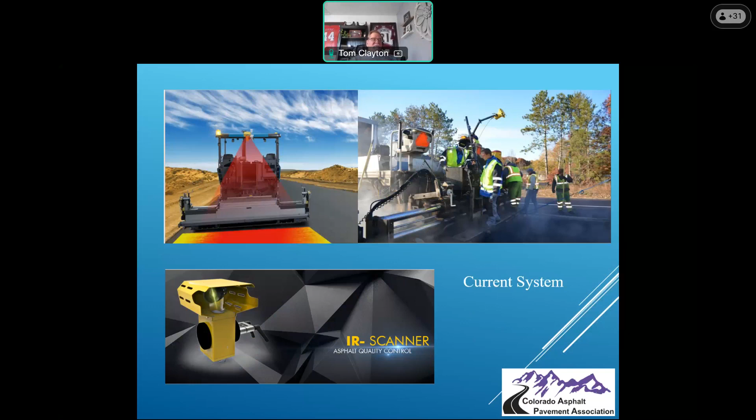So as we're getting to the end here, if you don't remember anything else today, remember compaction is in terms of temperature and not distance. Know what the mat temperature is at all times. Read the mat. I talked about when they're starting compaction, listen to the drums, listen to the roller. It will change tone as it gets denser. It changes tone. Listen to it.

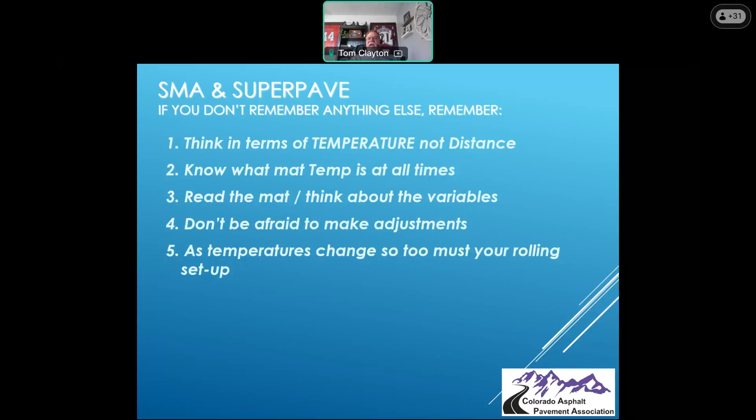Don't be afraid for the contractor to work with the contractor to make adjustments if needed. As temperatures change, so must the roller setup, so must everything else. Cooler this time of year, they have to adjust. In the middle of the summer, it's an adjustment. Everything's going to spread out, there's a lot more moving. Know what the density is behind each roller operation.

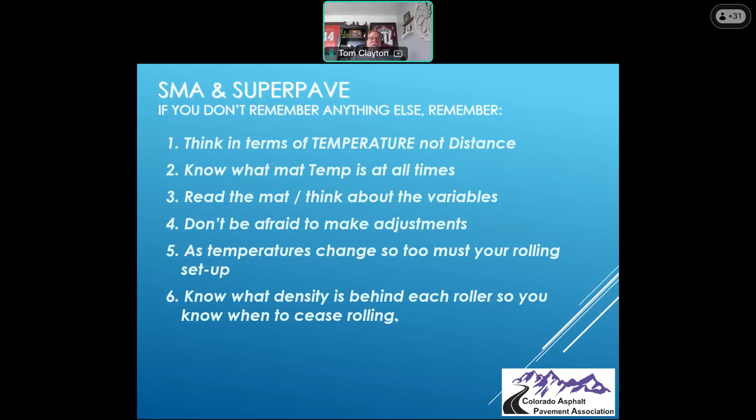Getting out, it's important that after the breakdown, density tests are being taken so you know how much gain we got from when it was placed. The density goes down, then after the breakdown, we got this much gain. From the breakdown to the intermediate, we got this much gain. From the intermediate to the finish roller, we got this much gain. We need to know what these are from placement to finish, and that's in the early stages. It does take time, and it doesn't hurt to do it once in a while, but with that said, you'll understand the big picture better if you know what's going on.

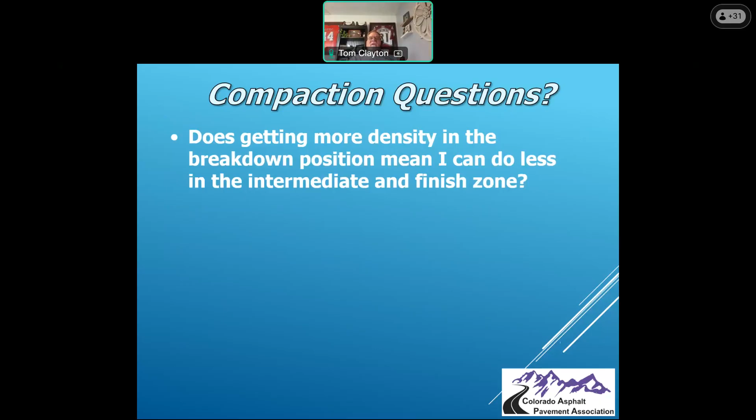So some more questions here. Does getting more density in the breakdown position mean I could do less in the intermediate and finish zone? Yes and no. If you're getting more in the breakdown, are you causing damage by doing that, or did you overcompact it, meaning you started causing fracturing? You have to make an evaluation: is the overcompacting in the breakdown causing damage? If it is, then no, don't do it. But if it doesn't, yes, you can change how much intermediate and finish rolling you're doing.

Should I use the automatic systems on the equipment? Absolutely. Their automatic systems are way smarter than any of us. So it's just a matter of monitoring, making sure the people on the equipment know what the systems are doing.

Once I establish and follow a proper roller pattern, can I stop testing? No, you can stop testing as much, but it still needs to be tested because you constantly need to verify what's going on.

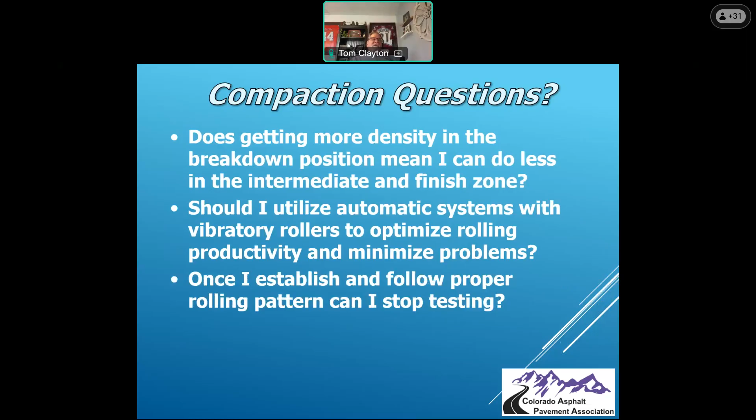So we've spent the last hour and 47 minutes, with a few minor glitches there. This comes down to one statement: it's all up to you as inspectors, engineers, testers, paving contractors, whoever. Remember, I talked way earlier, once we're on a project, we are not adversarial to each other. We are teammates. We need to work together to get the job done in the most efficient manner for the longest lasting road. So it's all up to you. Quality pavement and compaction must be your goal.